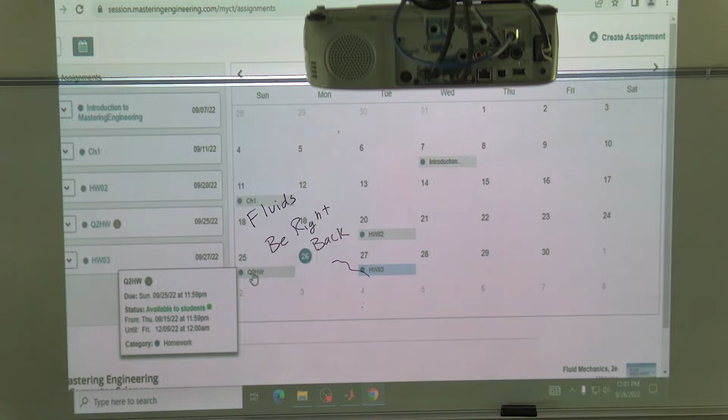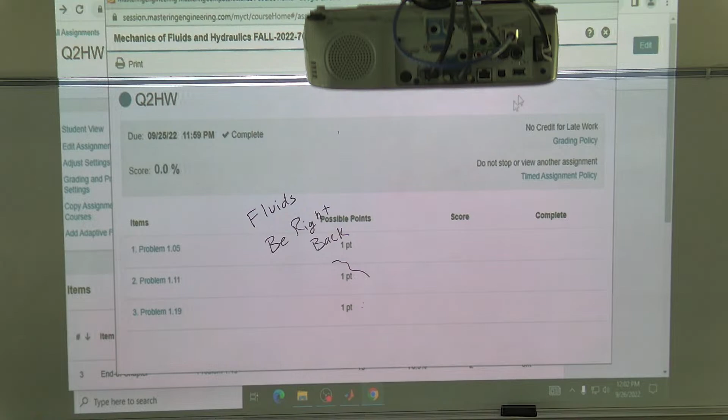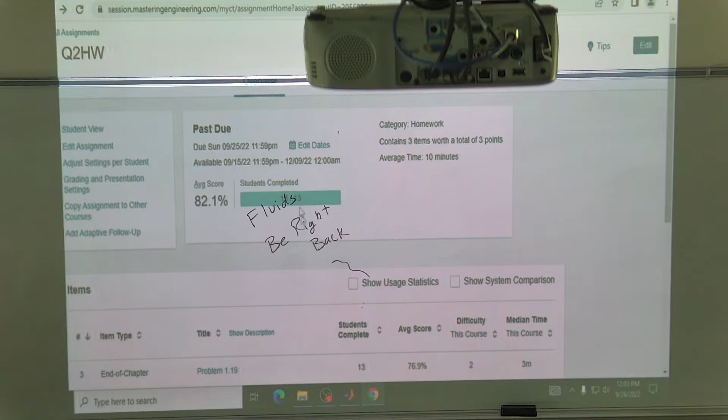Well, I'll try to poke at it and see what I can find out. I will probably need to do that with several. How about that? Basic. I don't know, you can just look at that later and, yeah, don't worry about it right now. I just wanted to say that before I forgot about it.

Well, let me start up. There used to be a trash can. Oh, it's in the back. No? Yeah, it's in the back. Oh yeah, swap doors on you.

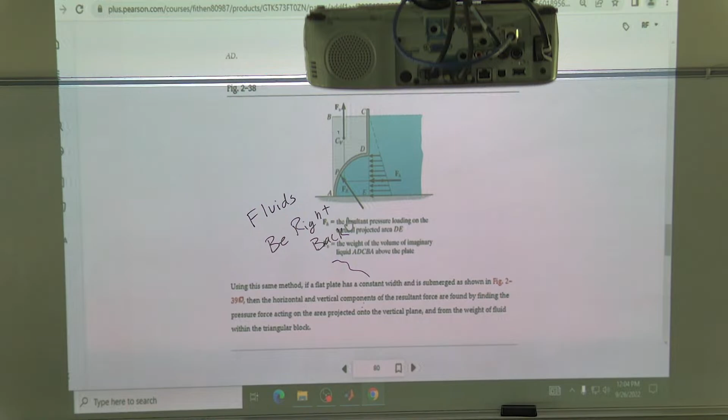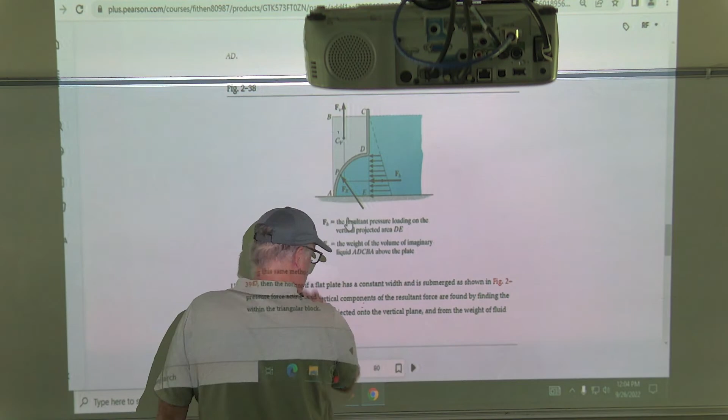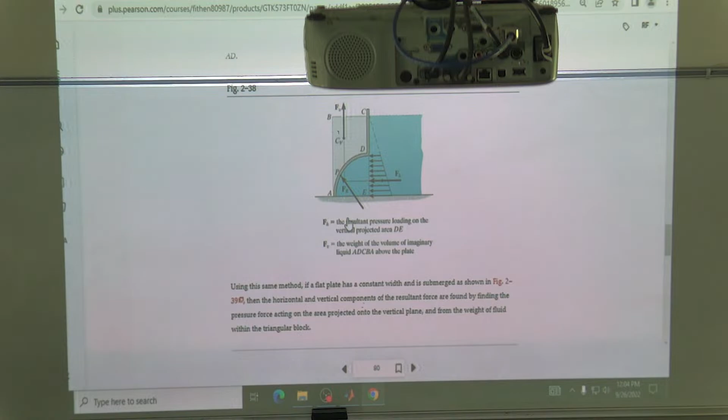So we'll do a little bit on curved gates and set up. So on this one, let me make it bigger. So is this an example? No, it's just a figure. Okay. This one's interesting because some books used to call it a pseudo volume.

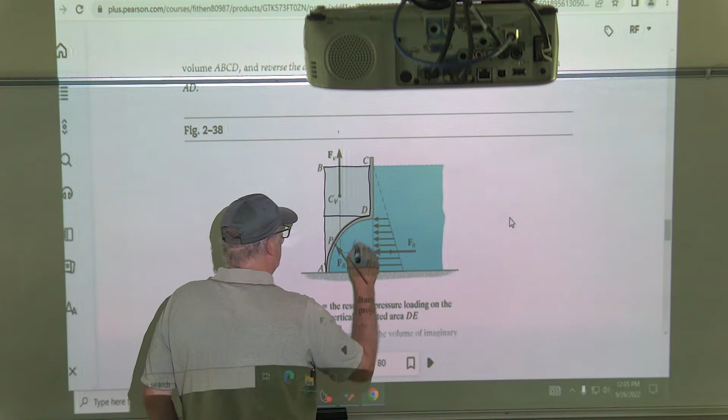So I'll just try to make that. Well, maybe I'll find one like this in the book to work. But essentially what this is, if you imagine that there's this volume of water above it, that would equalize if you were able to get rid of the metal and just put that on it. The water would hold everything down, nothing would come up. So essentially, the reason he's got this arrow reversed is because this load is like a pseudo volume. In other words, it's not really there, but here, let's do it this way.

We'll get rid of his and say we have a force going up here and a centroid going up here. Those are the vertical forces there. So you add that and that together, and then you got this force that's right here. And all this water is pushing up. There's also pushing to the left. The upwards push or pull would be from this amount and this amount. The left to right would be this amount.

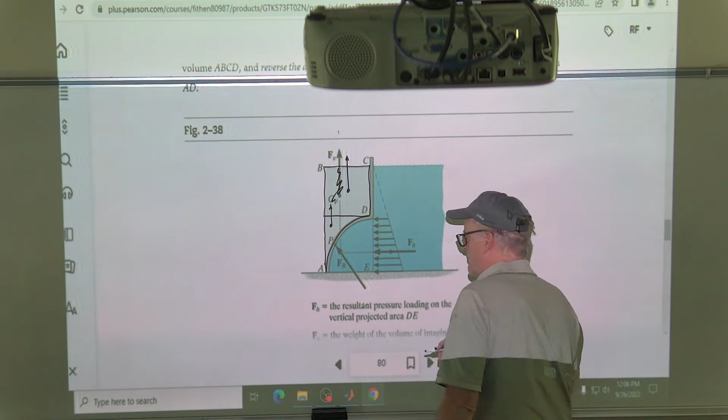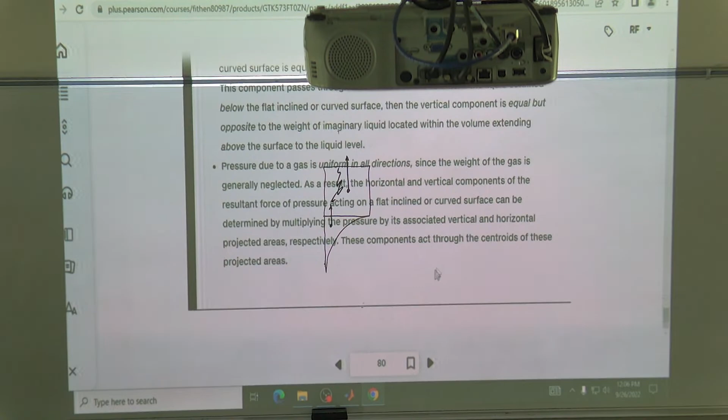So let's go find a problem that's inverted like that and put numbers to it. I hate to dream one up, especially knowing that if he has that drawn, he probably has one. So let me bounce through here, or maybe I'll go to the table of contents, find out exactly where I'm at, and go find problems.

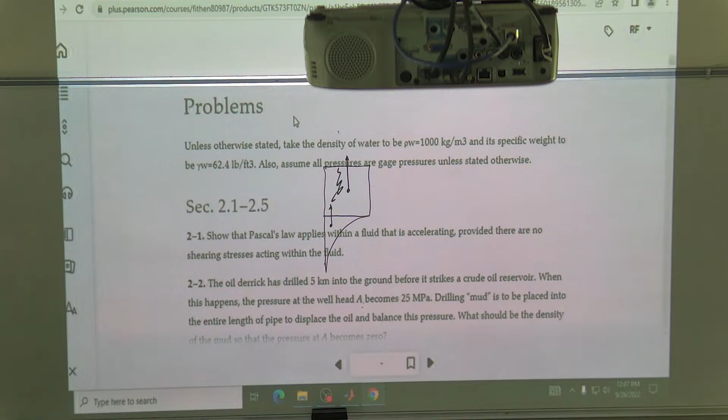And as soon as this comes up, I'll roll down till I find one that looks like that. Okie dokie. Let's try this, sometimes that works. Isn't that weird? You refresh it and it shows up. So what I'm looking for, of course, is I like good pictures. He has good pictures.

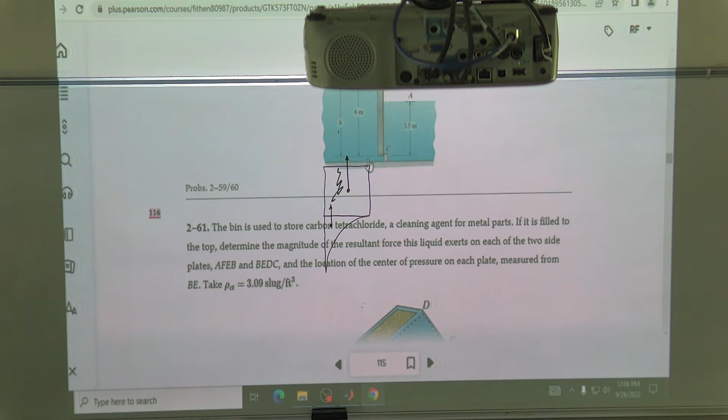Looking for a curved one that the water is pushing up on. Did I do that? Yeah, you highlighted that one. Oh, did I? Come on, there's got to be one that's going upwards. That's a downward, that's the water pushing down on that.

Technically that's that, but I'd like to see a little bit different, but I guess if that's all I got, that may be all I got. Oh, here's a good one. Okay. So the quarter circular plate pinned at A is tied with a cable BC. Unless there's a better one down there, but that's no better. We might go look at that one, but we'll do this one.

If the tank is 4 foot wide, determine the horizontal reactions at A and the tension in the cable. Let me get my stuff off there. I'm guessing that that's water. If it's not, I'm gonna make it water.

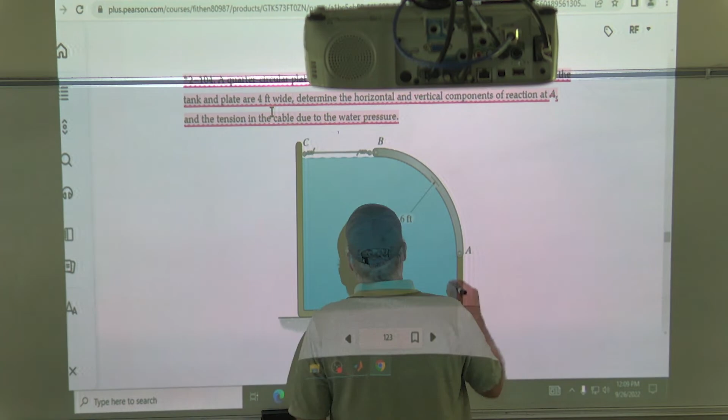Due to the water pressure, okay. Let me see if I can do a halfway decent job. Okay, and then the arc is this, yeah okay. So if I were able to take that amount of water that turned out to be a solid and just stick it on there, it would be the same force.

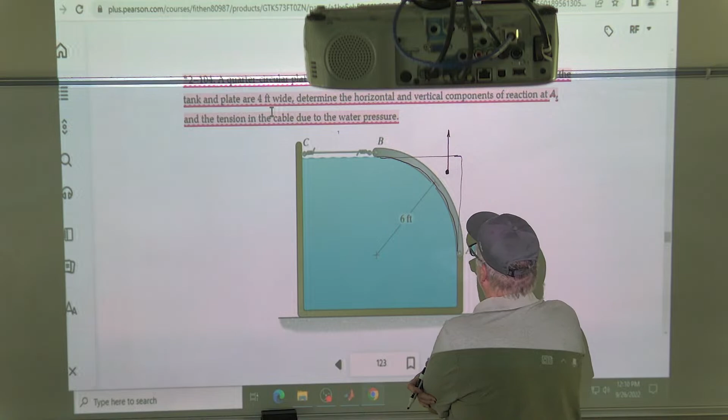So this is essentially, and I'm going to have trouble finding this, I think. Thing is, I'm going to have to find that centroid. Actually, come to think of it, it might not be that hard. But I've got that pushing or pulling, I guess you could say pushing up or pulling up, depending on whichever way you want to say it.

And then I got this pushing towards the right against this. That's not straight. Anyway, it's supposed to be like that. So I'll do that one first. And

Pressure is equal to gamma H, and that's 6 foot. So at the bottom, P is equal to 62.4 times 6, or... no, that's way off. 360 plus 12 plus 2.4. 62.4 times 6? 374.4. Right.

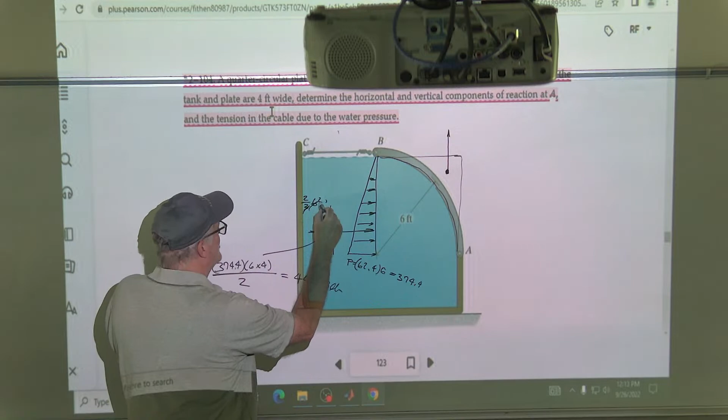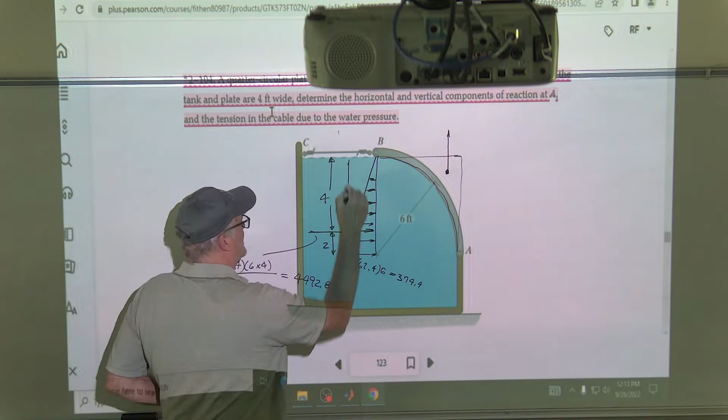So it's 2 foot from the bottom? 2 foot from the bottom, because it's triangular, and this is L over 3 here, and 2L over 3 here, and since L is 6, then that becomes 4 from the top, 2 from the bottom. Okay, so now that we got that, that's all great and wonderful and everything.

We got to find the upper part, and just to be on the easygoing side, I'm going to go look at centroid locations on Wikipedia, because I know I can go in and I know I can take a square, pull a circle out, yeah, I know I can do a 6 by 6, subtract out. Would it be a 6 by 6 or would it be a 6 by 4?

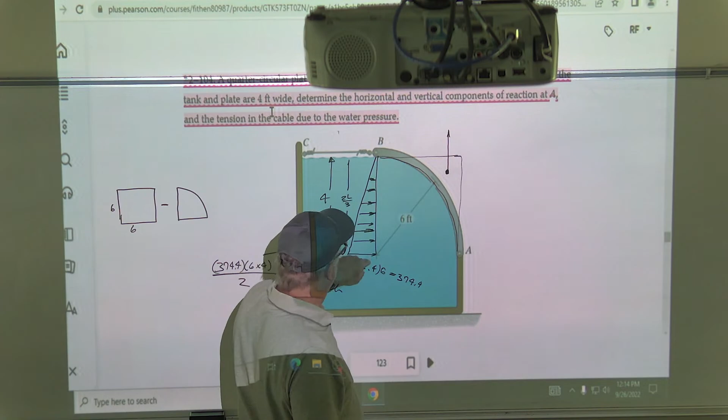Oh, well so what I'm doing is I'm looking at this, and then I'm going to take that out. So if I took that minus that, it would give me that. And then I'd have a centroid here and a centroid here, and I'd use that to find that other centroid. If I gotta do that, I gotta do it.

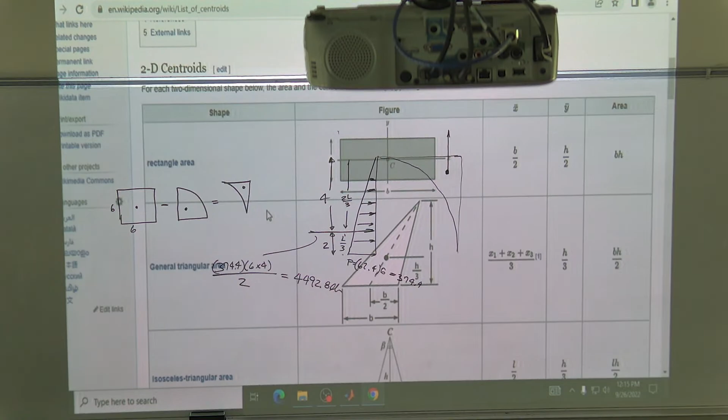But I bet you that if I go to Wikipedia, let's see. List of centroids. He has to have it. No, he doesn't have to have it. He's a very mean person not having that. But I do find the quarter cylinder. Oh man, can't believe I'm gonna have to find that. Why did I pick this problem? It's my own fault. Okay.

So how do you do that? You know what, I'm only gonna look for one, say maybe X. So I'll put a coordinate here, X, it'd be the same coordinate here, X, and the same here, X. And if you're looking for X bar, you take the area of X bar. The area of this is 6 by 6. The area of that is, what is that? Pi r squared over 3. Wait, 4... is it 4R over 3 pi?

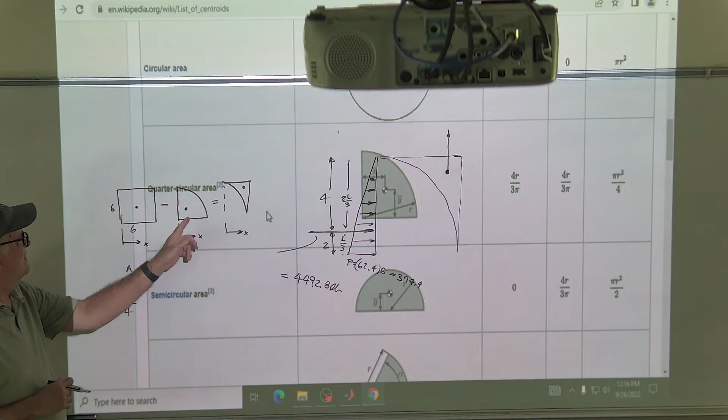Oh, this one? Yeah, for the quarter circular area. So what I'm doing, okay, I'll identify this. This is a statics problem. Identify this, and I want to get to that.

So what I'm doing is I'm listing this being 1, this being 2. The area of that one is pi r squared... wait a minute, 4r pi over 3 pi, r squared over 3. Now the x bar here is 3. The x bar there is 4r over 3 pi, r over 3 pi.

Then area, 6 times 6 times 3, 6 times 6... 96? 36 times 3, no that's not 96. 108.

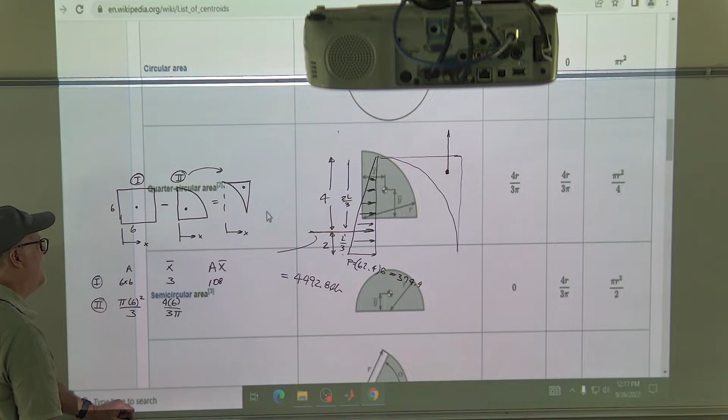Okay, so now I've got something interesting. That pi will cancel that pi. So what is those two? The pi's, 6 squared times 4 times 6 divided by 9. 6 squared, 4 times 6, so 36 times 24 divided by 9 is 96. Oh, there you go.

So now I got this weird thing. Which one gets subtracted? Okay, this one's this one. And if I take this and subtract that one, 108 minus 96... so I'm subtracting that. So 108 minus 96, yeah, what is that? Like, says a 12? No, 12, yeah, okay, 12.

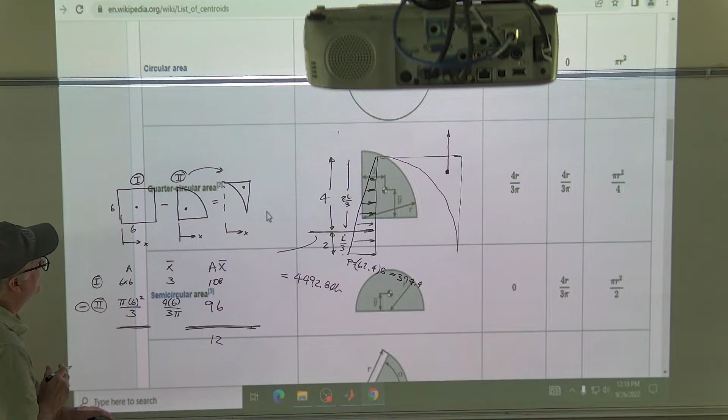Oh my gosh, now what is the sum of that? That's 36, that is some funky number. Give me a second. 37.69.

Okay, so I've done something wrong here. You know what I did wrong? That number is actually... oh, no, wait, no, I think I did it right. Okay, never mind, that's it.

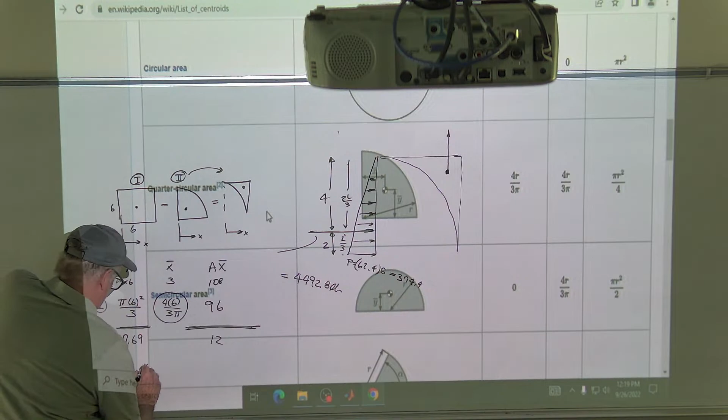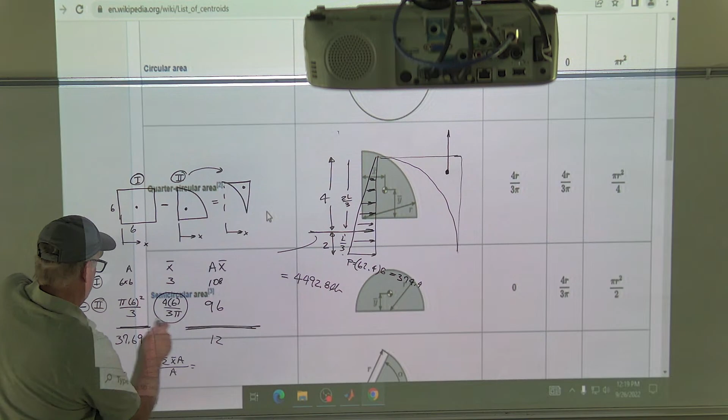Now it's really bothering me because, okay, so the x bar is equal to the sum of the x bar A's over the A's. But if I do the sums and I have a minus, wait a minute. I have to subtract, oh shoot, I have to subtract that, but I also have to subtract that. Sorry about that, I'm supposed to subtract that one, that one minus that one.

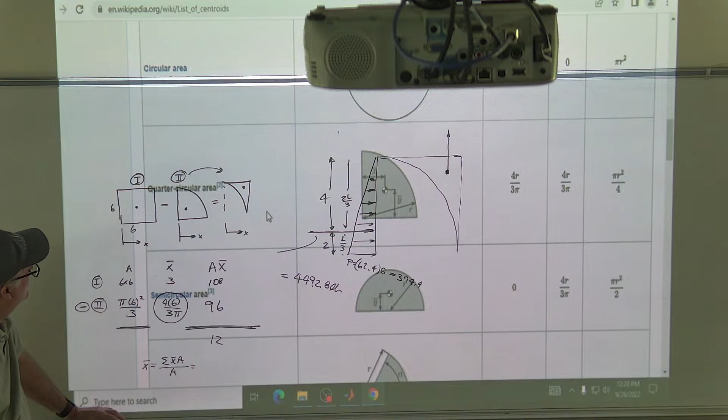Oh, okay, shoot, sorry about that. Hang on, let's go back. 6 times 6, 36, right, and then pi times... oh my gosh, wait a minute, something's wrong here. pi by 3. What's that? So 36. You know, I might look for the answer to this in some other location.

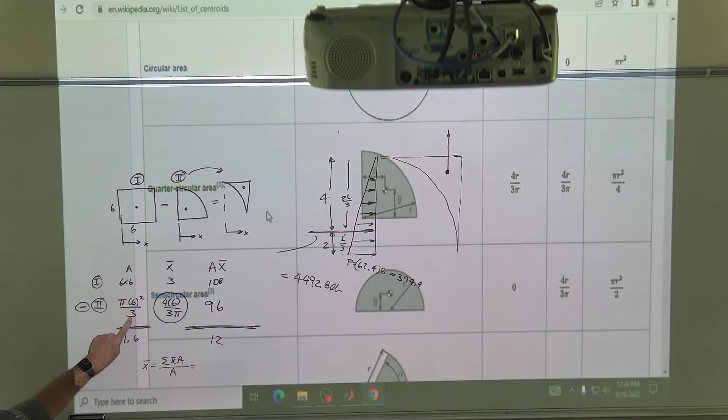Negative 1.6. Yeah, that doesn't make sense. You know what? That's supposed to be a 4. Why did I write a 3 there? Oh, I can't answer that one.

Okay, hang on, let's look at that again. You know what? I think I had a 3 there, and I erased it, and then I wrote a 3 back.

All right, so it's not possible for that area to be less than that area. That area is pi times... divided by 4. 28, 30, 36.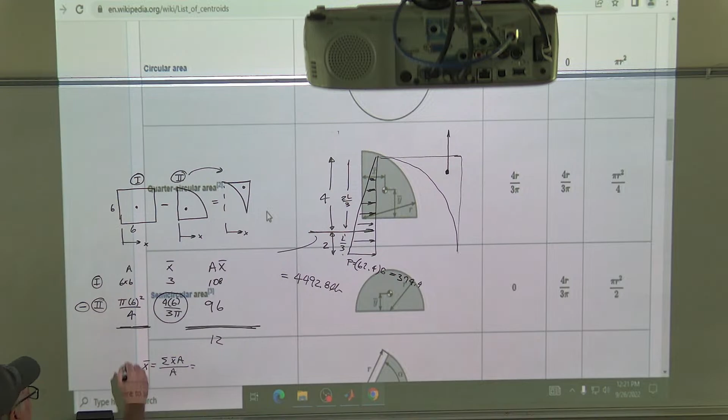Minus 7.72. So now, what is 12 divided by 7.72? Did I do that right? That's the areas, and that's that.

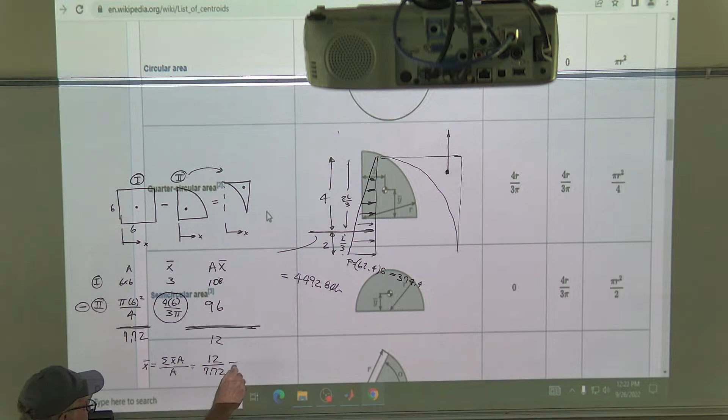What? That doesn't make sense. It doesn't make sense. Okay, that doesn't make sense because it has to be somewhere around 5.6, 5.7, 5.8, somewhere in that region.

It's going to be somewhere in that region. So, did I do my coordinates correct? 3 over... I'm subtracting off that, subtracting off that. Yeah, so I've done something oddball there.

Okay, here we go. Here we go. Well, what? Well, of course, I mean, oh wait, there was another one down there. Yeah, that's fine, but that's not what I was looking for.

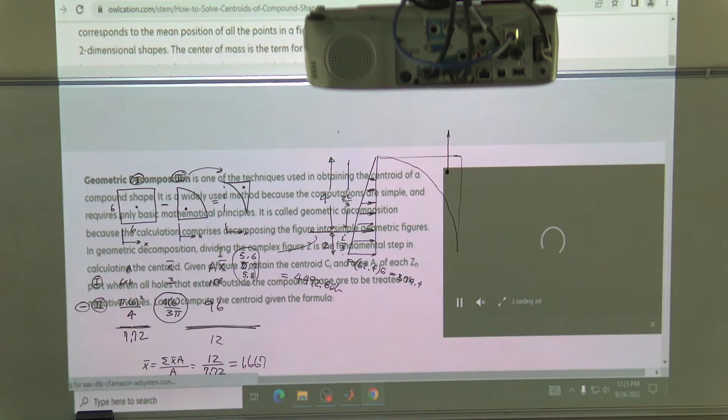Yeah, that's... oh, that's pretty cool. Look at all that. Yeah. Square minus quarter circle. I can't believe it. Pin it, what does that mean?

Yeah, I mean that's the way you do it. What did I do wrong? This is called a bad lecture. Let's see if we can fix it. Oh, that's the wrong thing. No, yeah, wait.

There we go, so we're back here. We want to find the location of that center. What am I doing wrong? 6x6 area, x bar, 6x4.

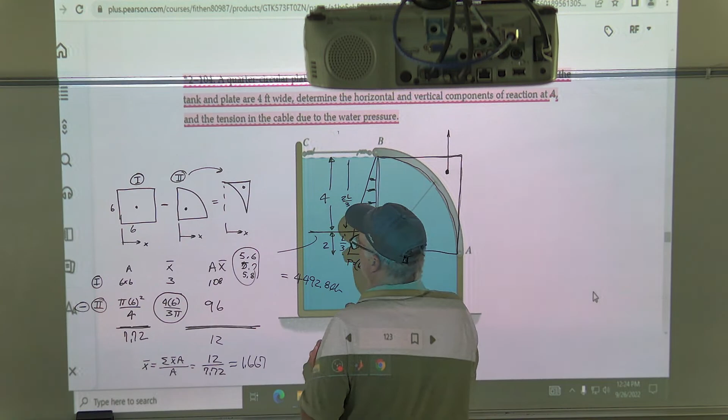Well, but what we're doing, we're trying to do this. Yeah, you're right, we're trying to take this and subtract off that. Wait, 6 from, wouldn't it be a 3x3 then? Well, it's a 6 foot, and then a 6 foot. So it's 6 foot, 6 foot. Then...

4r, which is 4 times 6 over 3 pi. And then, you know what, I'm beginning to think about that one now too. Let's try something. Because now, hang on, of course that 96 ain't gonna come out right. We had the 3 there, and yeah, now it's a 4. Yeah, so, yeah, let's see.

Did you get 144? I was fixing to say, I'm still in the process, but that sounded better.

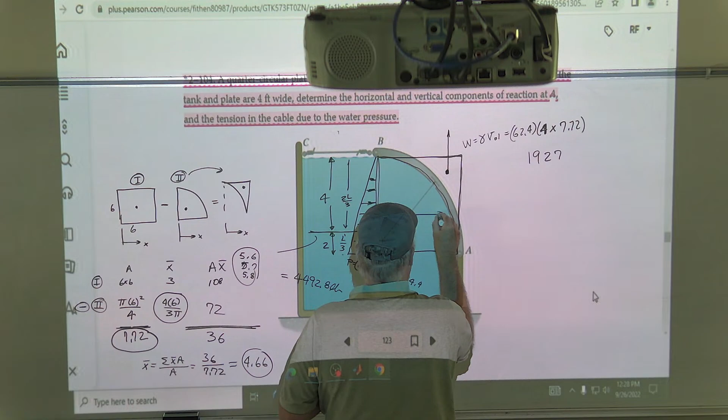Okay, how do I do this? The distance from here to here. 4.66.

Okay, so at this point, if I somewhat break away a free body diagram, let's see if I can do it here. Okay, got this. I'll say got hinge force in the X, hinge force in the Y.

You got the tension of the cable. You got this force pushing to the right, which we found to be 4492.8.

And it was, okay, so we're probably going to sum the moments about the hinge. So it was 2 up from here. And this thing is...

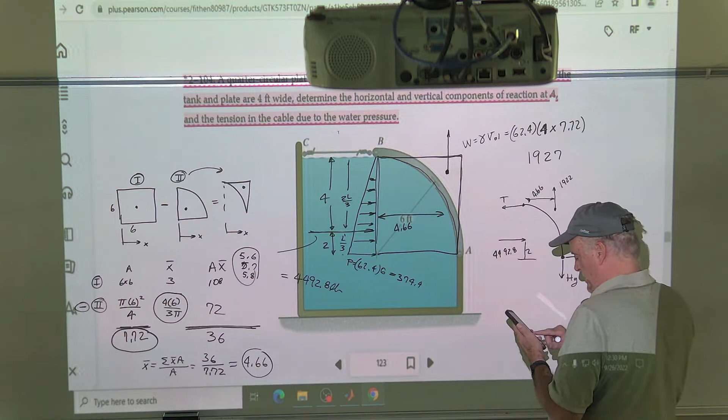1922, but it is a distance 4.66, or 6 minus 4.66 would be 1.34 right there. And that's all you got.

So now you'd sum the moments about the hinge, and I'll just make that positive, equals 0. Let's see. I'll take this one first. It goes this way, it would be a minus

4492.8 times 2. We'll take this one next. It's going in a minus way.

1922, 1.34. And I worry about dropping digits. And then I got the tension, and it's 6 foot away. And that's going in the positive direction.

6 times the tension. So the tension of this thing should be, move the negative over to the other side, it becomes positive. 2 times 4492.8 plus 1922 times 1.34, divided by 6, and that should give us our tension.

Sum of the forces in the Y will tell you there's only that in the Y. That'll tell you that's 1922. That's the force pushing up on it because of the lack of the volume there.

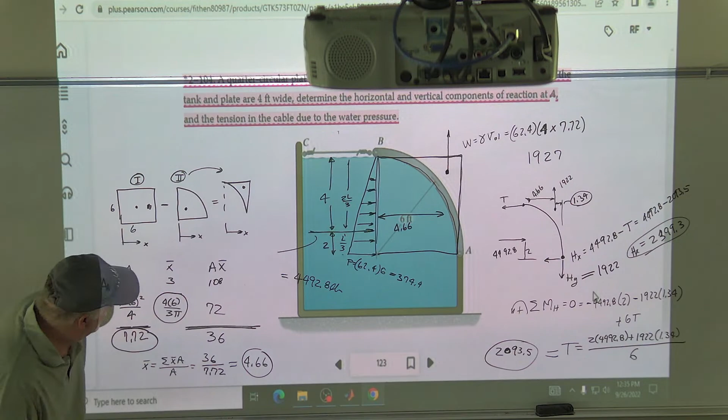But I knew it had to be something, you know. Okay, I was just trying to figure out how you rationalize that, because you can tell you made a mistake, and I was just trying to make sure I wasn't missing something. Yeah.

I bet you if you search long enough, you could find that. But the thing is, you already know how to do it. I was just trying to be lazy. Let me see, I'm going to try to be lazy again, although I already did it.

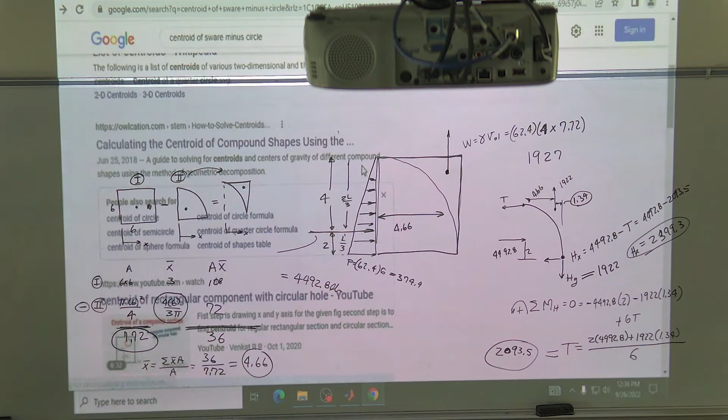How about an exhaustive list? Let's see if I can find... circular hole, that's no good. Simple composite shapes, that's no good. Oh, here we go. What, this dude's doing it. Maybe? No, he's not.

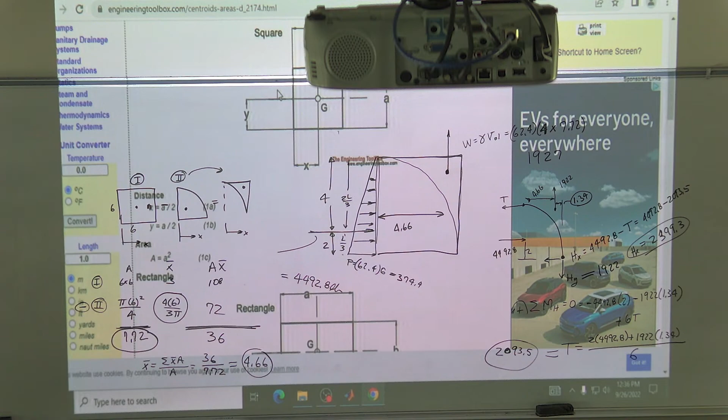Engineering toolbox. Okay, yeah, that's fine, those are that. Oh, it's just all of them listed. Oh, that's no good, wait a minute. I bet I know how to do this. What's that thing called? Oh shoot, it's not engineering. SkyCiv?

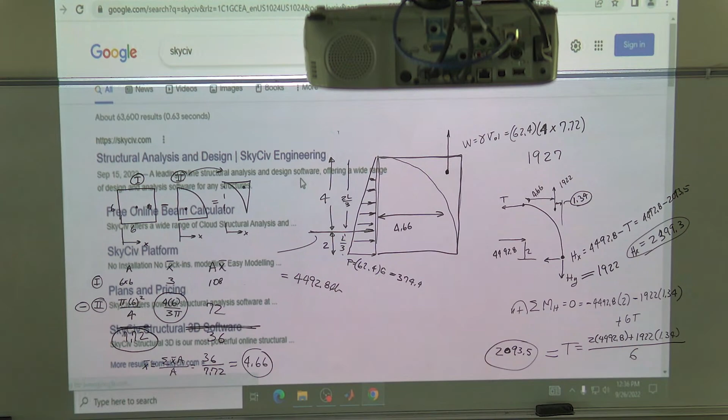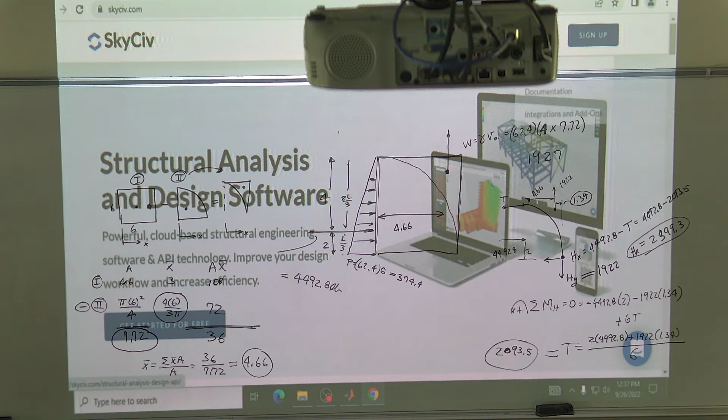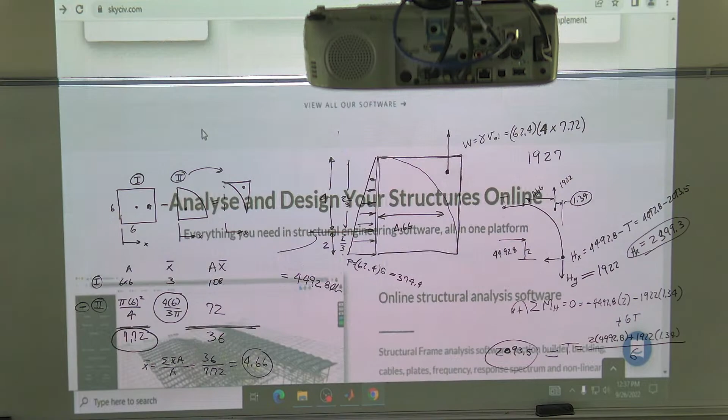That might be it, maybe. No. Okay, so let's... I thought you could just go for free. Easy modelling, no lock-ins. Yeah, I'm too lazy to even log in, I don't want to do that. Trusted by thousands, millions, and billions of people. Anyway, this is too much.

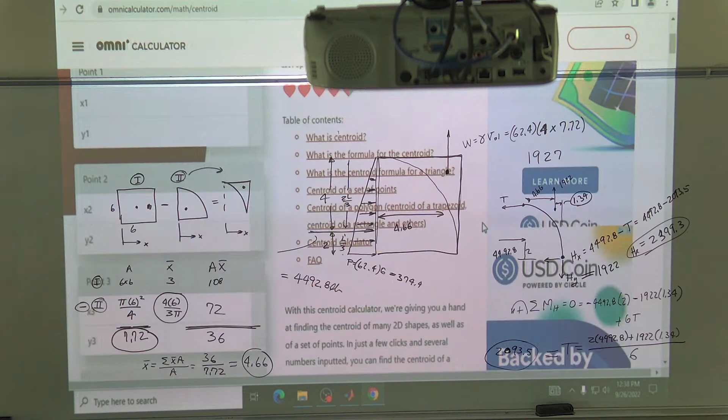Oh, I know, let's do this. I misspelled that. Let's see if we can find somebody. Centroid calculator, let's see, Omni calculator. Hello, I'm the centroid calculator. What is a centroid? Centroid calculator, there you go.

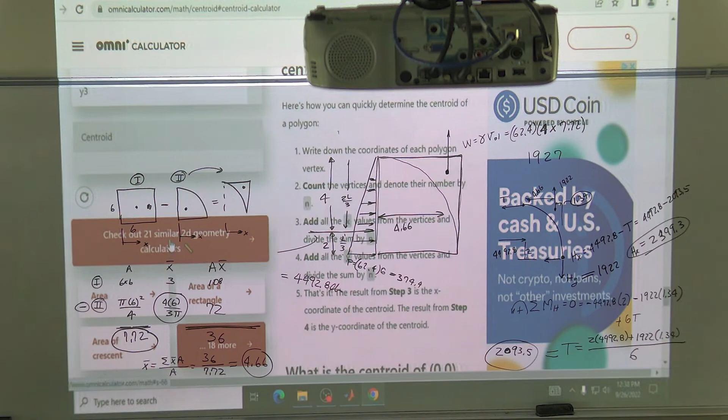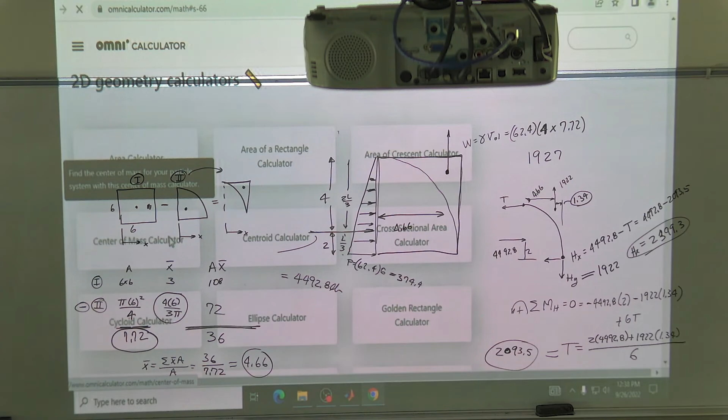So I don't know what he's got here. Check out the 2D calculators. Whoa, 2D calculators, whoa. Trapezoid, center of mass calculator. I don't want to do that one. And next to it was the centroid calculator, but I don't see a calculator. Shape, triangle inside a polygon. That's no fun.

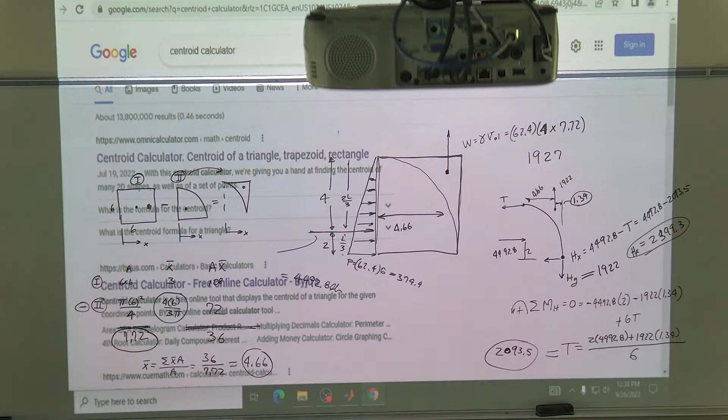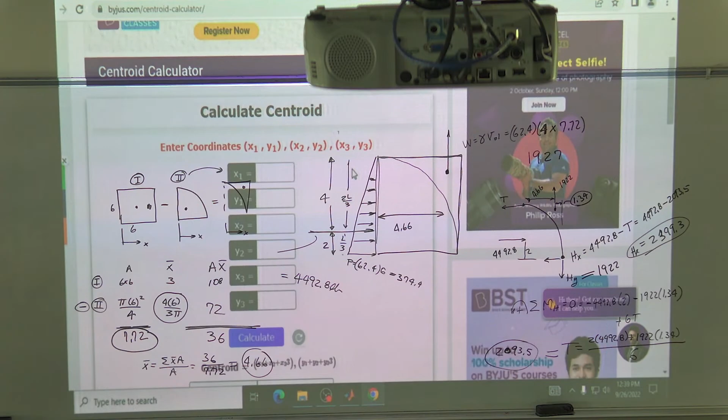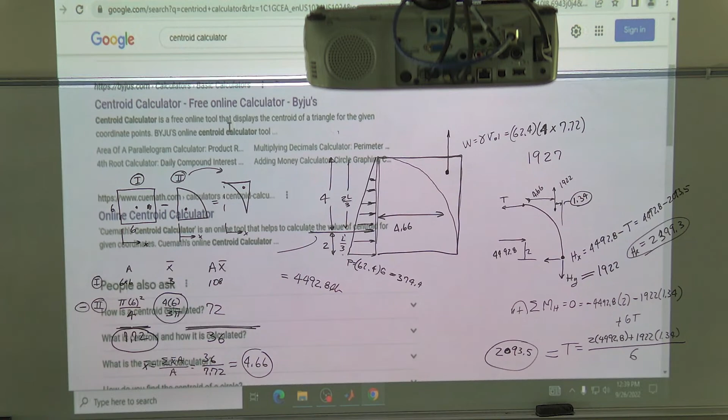Area of a crescent, 18 more. Oh, we're back in the 2D calculators. Yeah. Centroid calculator, free online calculator. I'm wasting a lot of time, aren't I? Look at this dude, enter some coordinates, calculate the centroid of a bunch of coordinates. Okay, that's just triangular calculations. Online centroid calculator, is that the one I just went to? In calculators, that's basically, it's all triangular.

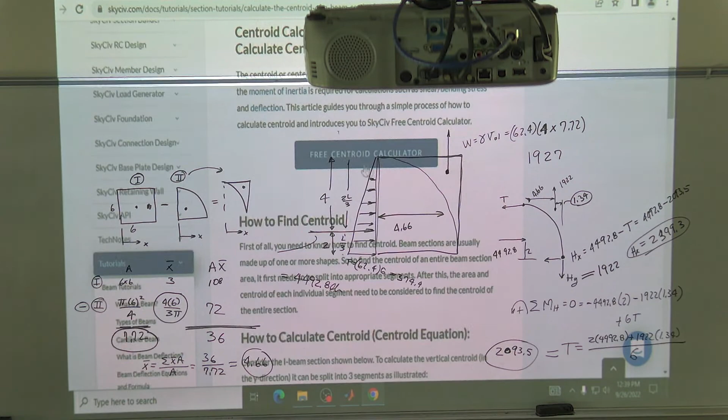Okay, centroid of a beam section here. You see how he... here. Free centroid calculator. Okay, there's a something, yeah, that's it. There you go, here we're just making a 6 by 6. There you go, well, you can't do anything else but calculate. There you go, oh look at that. Sign up, show my results. Well, that's not exactly what I wanted, but there's no harm done. Well, you can see by the time I did that, I could have already calculated this.

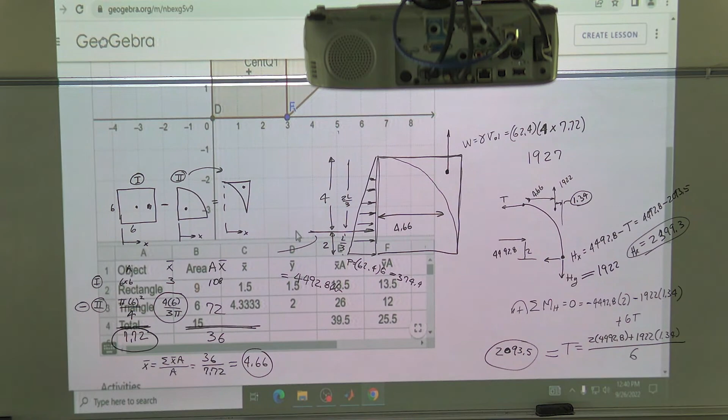Yeah, I'm done with it. Composite centroid calculator, oh, GeoGebra, oh yeah, those guys are good. There you go, so centroid, that's good. Yep, that's not exactly what I wanted, but hey. Let's see, can I just click that and go? So you can make this go whoop, like that. There you go, but it only does the triangular, it won't do the curve. I don't know, let's see.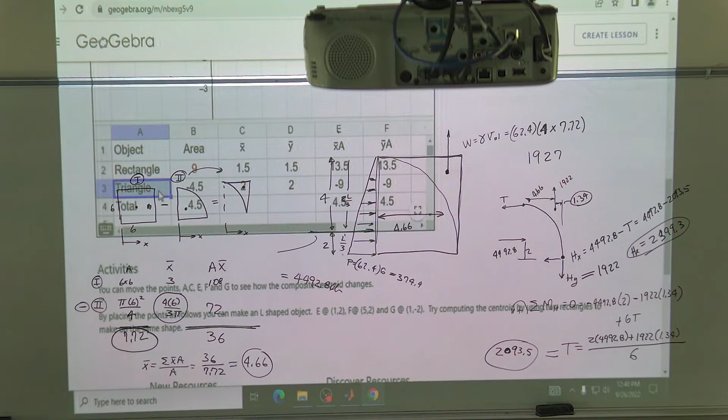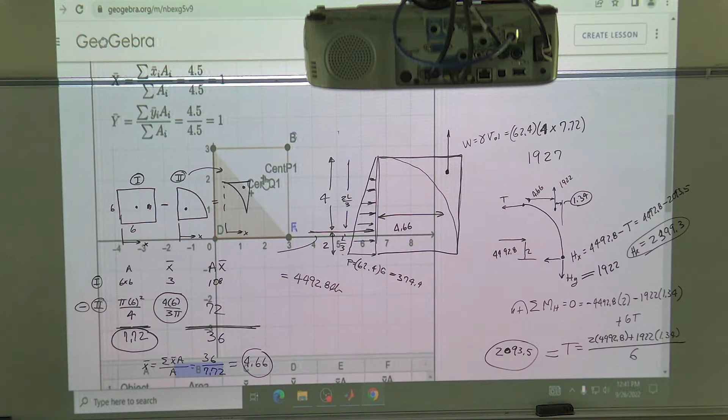How about we do circle? Well, what happened to it there? 1, 2, 3, F is X. That's it, I don't know, I have no idea what I'm doing. Okay, there's the area, X bar, it adds it up. How about we do this circle? Did it do anything? It didn't change it to a circle, I bet. Nope, didn't change it to a circle, you just changed your title. Yeah. Oh well.

Ooh, look at that, whoa, lots of things you can move around. Ooh, whoa, whoa, whoa, whoa. Isn't that nice and animated?

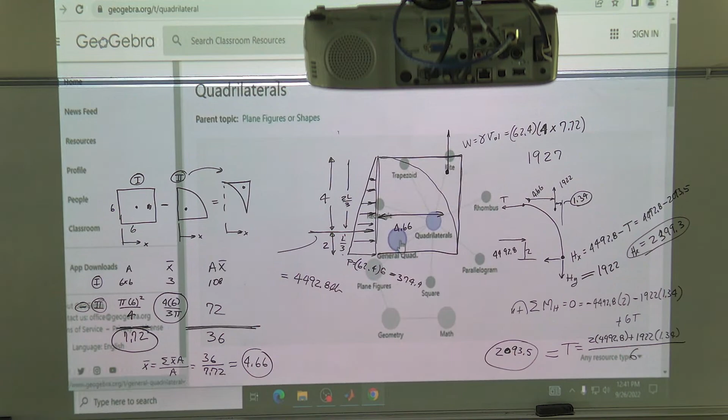Okay, see, that's why you need to know how to do stuff, because somebody's got to do that, and somebody might not have done that. And look at what he's done to us here, he's been very mean to us here. And so now we have to calculate the centroid of this thing. That's very mean of him. And it's kind of too late to do that one, but here, we'll look at that one.

A semicircular gate is used to control the water over a spillway. If the water is at the highest level as shown, determine the horizontal and vertical components of the reactions at pin A and the normal reactions at B. The gate has a weight of 8 megagrams at its mass center, I think that's the letter G. It's 4 meters wide.

So let's look at this. Here's the funny thing about this.

That is, one, the aspect ratio doesn't look like a circle, but if you go look at the thing on the computer screen, it looks just like a circle.

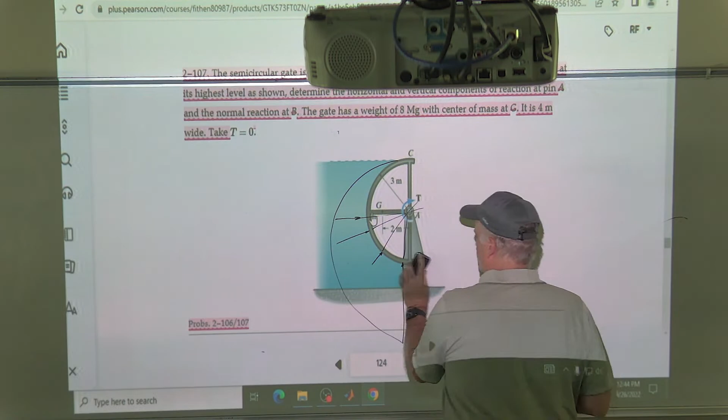Okay, so since all the forces, the little forces all the way up to the big ones, all shove their way through that, they don't produce a moment about A, no matter how deep the water is. So actually, if you look at the drawing as far as finding the reactions at B, you get something weird and interesting. What you get is a reaction there, and the weight of the gate, the water does nothing. It all passes through the center of this thing.

Oh, does he say something about the... He just says something about the reaction. So I guess he's implying this T. He never says anything about that torque. Oh, maybe he says something about it at one of the other problems.

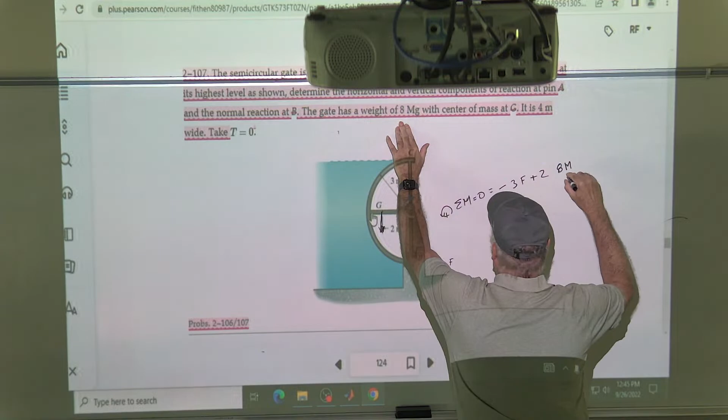Okay, so this force is going to be, so if you look at this, it's 3 meters. So the sum of the moments, making it positive, equals 0. I'm going to assume that torque isn't there. And then what I'll do is, that is negative 3 meters times F plus 2 meters times 8 megagrams, times 9.81, and that's what gives the force.

Is that right? Yeah. Is it milligrams or megagrams? I think that's megagrams, I think the big M is megagrams. Yeah, that makes more sense, because milli means less. So that would be whatever that number is: 2 times 8,000, times 9.81, divided by 3.

And I do not have a feel for that weight, I just don't know. 150080. 158080. Wait, I may have written 150080. Oh, okay. 150080. Yeah, 150,000. Okay, now the next question is, what was the next question?

Oh, determine the horizontal and vertical components of the reaction at the pin. Well, you just had the... okay, that's really mean. Okay, so what you got is you got that, you got this.

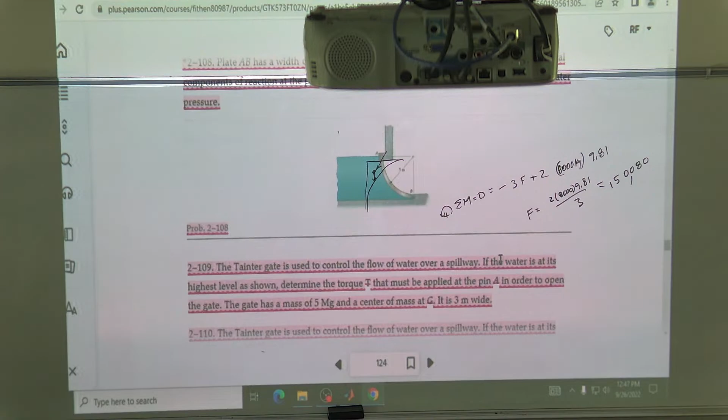You know what, this is a book that has tables in it. Let me just see something. Let me just see now. Okay, I don't know about this book. I know in the previous book he put them in what's called the front material, or maybe it's in the back material, endpapers. Okay, the endpapers is stuff like that.

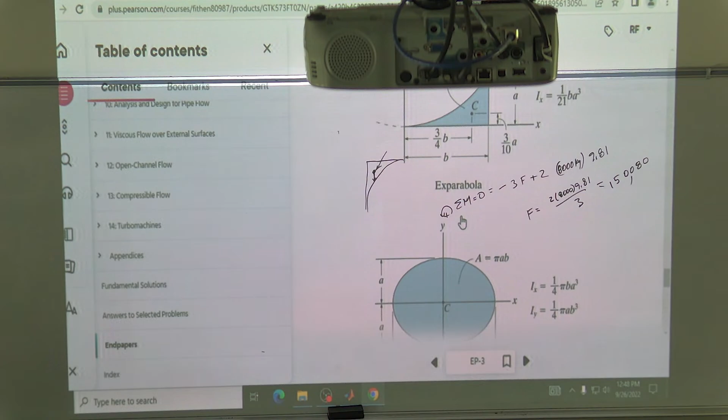Okay, area, can you give it to me? Come on, man. Oh wait, no, that's a parabola, he did that. Oh, come on, man. You mean you did that, and you're not willing to do the circle minus the square, or the square minus the circle? Oh jeez, I'm just too tired today. I lost my energy.

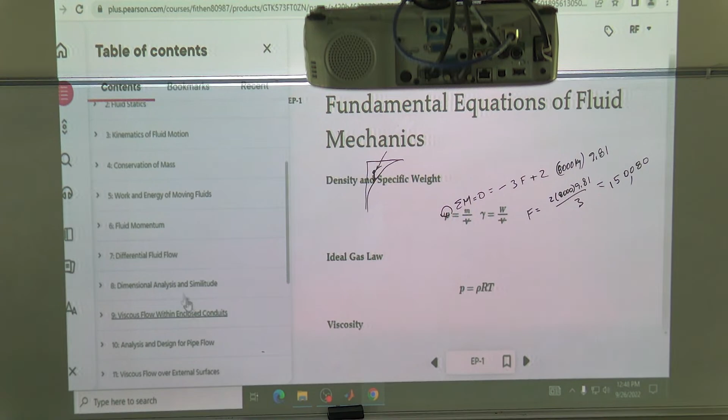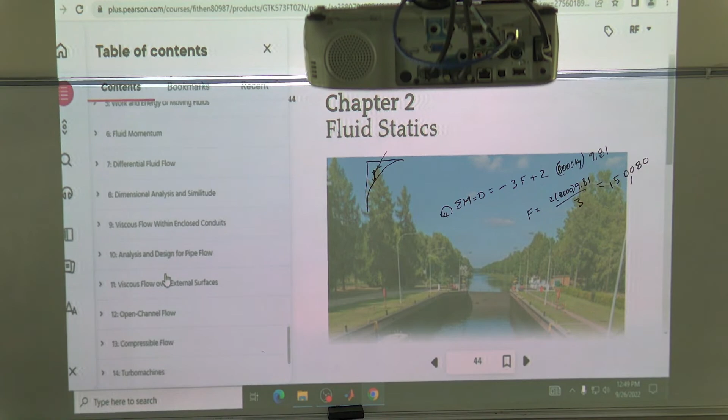So, apparently, where was I? I don't even know where I was now. And then get down here to, keep going to, almost there. Almost, no.

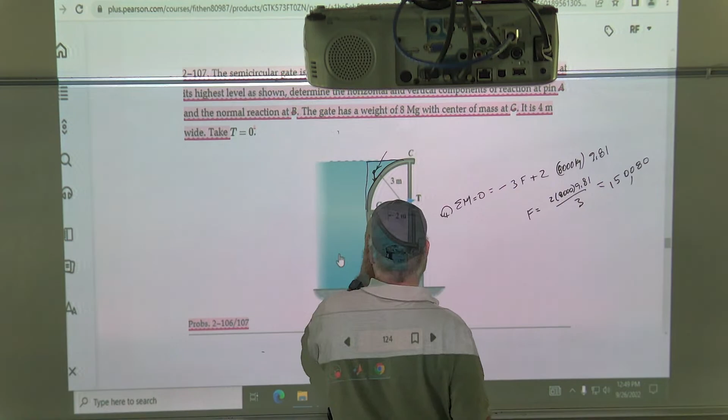It looks like a water wheel. There it was, there it is. So, in order for me to do this, I gotta come up with that one. And then I've gotta come up with the one that sits above this one.

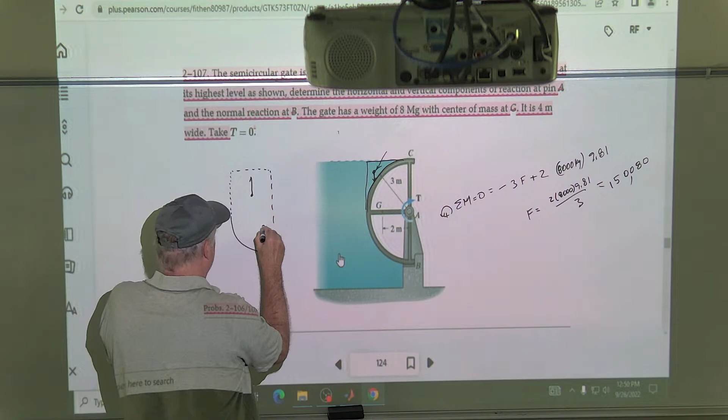So it's kind of weird, so I'll move off to the side over here in order to find the force above here. I gotta find that one and then this one. So those two would be the force on the bottom. This one will be the force on the top. And then I'll have a force going that way.

But I think I'm too tired and it's already past time, so it's a longer problem. Most of the complexity comes in from the, oh, and by the way, I just find it to here, because that's where that goes to. Maybe I'll come back and visit this one next time.